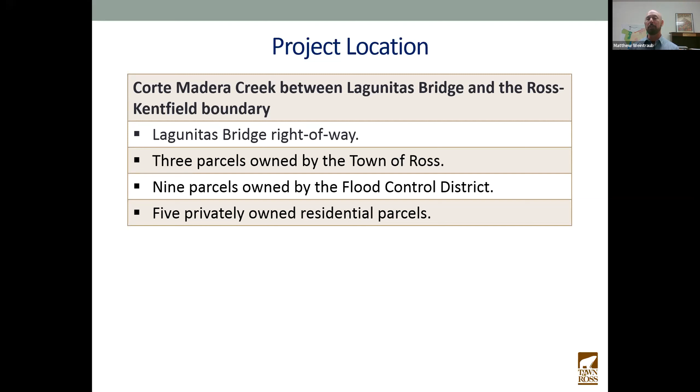I'm actually not going to share that many visuals during my presentation. I'm going to let the Flood District really show the details of the project.

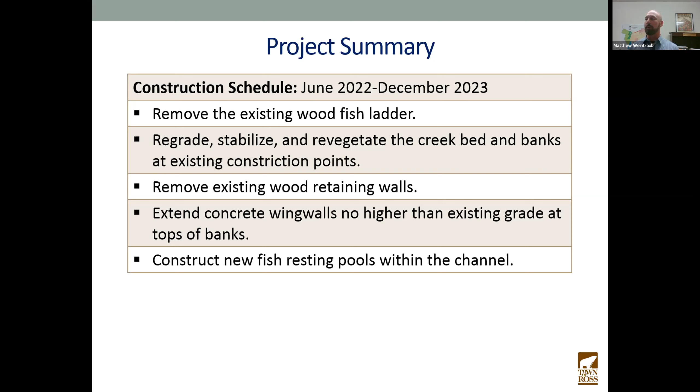Project summary: construction is scheduled for approximately 18 months, between June of this year and all of 2023. Major project components include removing the existing wood fish ladder, which is essentially an obstruction in the channel, regrading, stabilizing, and revegetating the creek bed and the banks at the existing constriction point, removing existing wood retaining walls, extending the concrete wing walls no higher than the existing grade at the tops of banks, and constructing new fish resting pools within the channel.

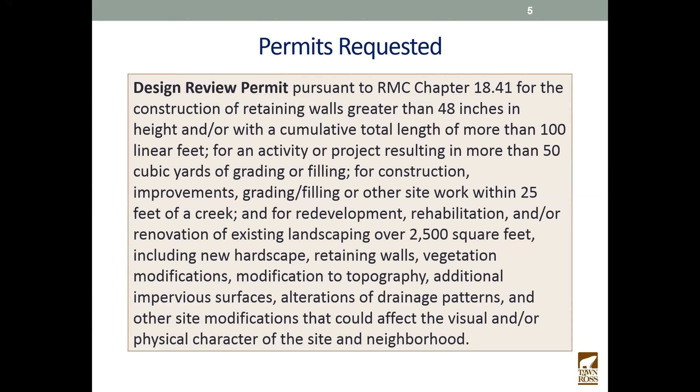A design review permit is requested. The project meets several of the thresholds for design review. I won't go through those details here. The details are included in the staff report, and I can cover any details that are requested.

Public notice area, as for all design review applications, was 300 feet. There were no written comments received in response to the notice. And to conclude, staff requests that the ADR group allow public comment, discuss the merits of the project, and provide a formal recommendation to the town council regarding consistency with design review.

That concludes my initial introduction to the project. I would like to now turn it over to Joanna Dixon with the Flood Control District, and I believe she would like to present further information on the project. I'm available to answer questions. Thank you.

Thank you, Matthew. Thank you, Matthew. Can everyone hear me all right? Yes. Oh. Hello, thank you for having us.

Good evening. I'm Joanna Dixon from the Marin County Flood Control District. We appreciate your time and interest in reviewing our details of the proposed Corte Madera Creek Flood Restoration Project, or Flood Risk Management Project, rather.

The Flood District is a separately funded district, which is staffed by employees of the county and funded through the tax revenues and fees that are collected from property owners within the limits of the Flood Control District Zone 9. And the district seeks to manage and use the funding collected locally and any grant money that may be available to help reduce the risk of flooding. And the district often partners with municipalities and other local groups to deliver projects that meet these objectives.

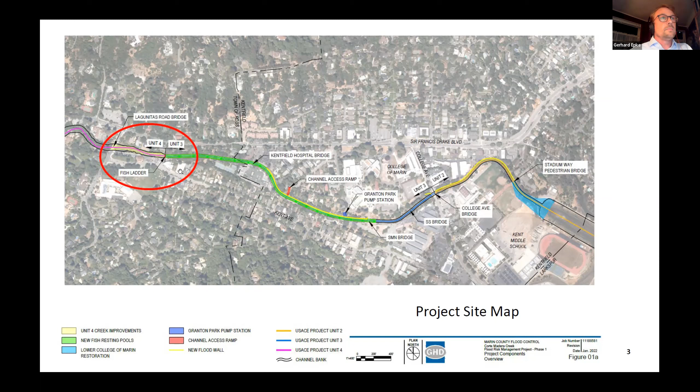As has been mentioned, this is part of a larger project that extends all the way down the concrete channel. We're only going to be talking about the portion within the town of Ross. Another part of the project within the town of Ross is improving the existing fish resting pools downstream from the fish ladder in the concrete channel, but we're not really going to dwell on that. We're going to focus on this area. So this is probably familiar to you.

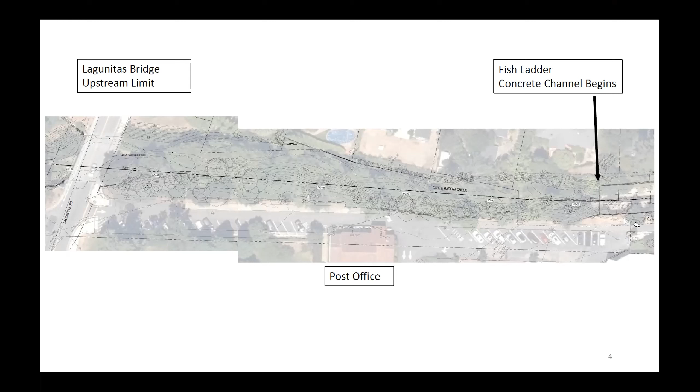Here's the Lagunitas Road Bridge, the upstream extent of the project. The creek is here along the parking lot. This is the post office building. These are private residences along Sir Francis Drake. And then right here, where the bike path kind of starts, there's a porta potty and a little way to look through the chain link fence at the upstream end of the concrete channel.

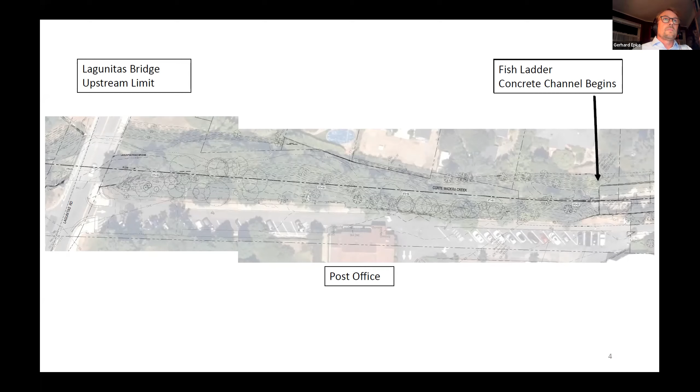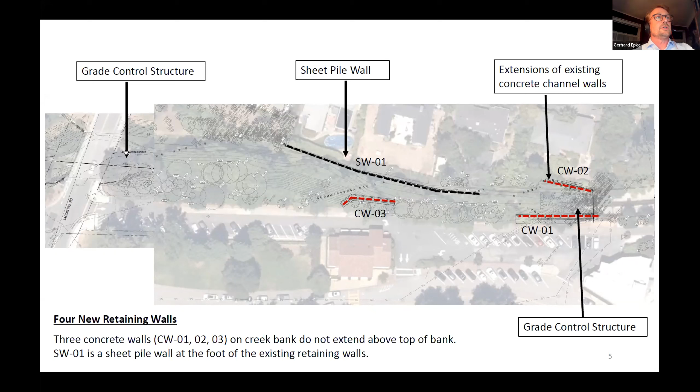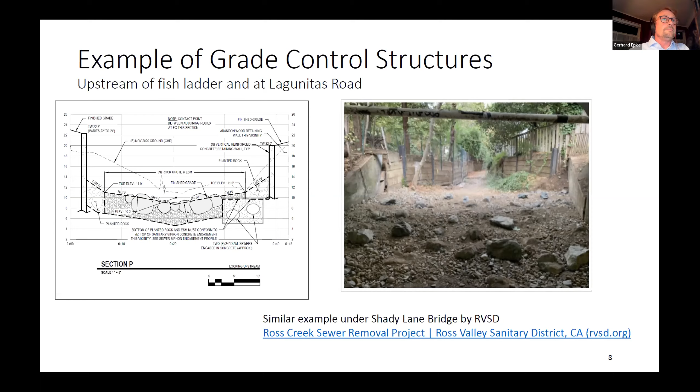At the base of and adjacent to the concrete and sheet pile retaining walls is bank stabilization in the form of rock slope or riprap. These are placed boulders, shown in the shaded gray areas. Here's an example—these boulders resist scour, protect the channel, or protect the stream bank from erosion, and will be planted. I'll get into the planting plan in a second.

Higher on the bank, where it gets disturbed, there will be some erosion control fabric and vegetated soil lifts, shown in tan here.

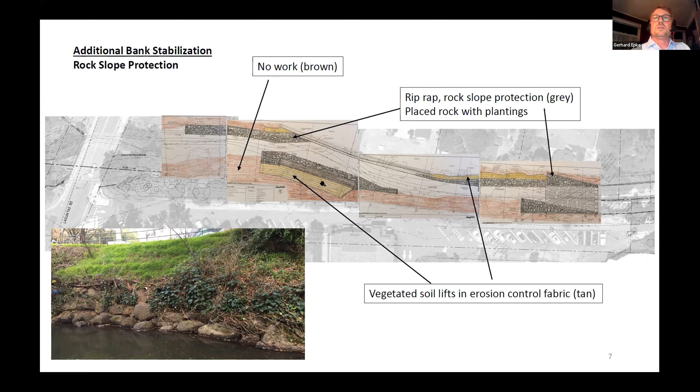This slide shows the trees proposed for removal. There's a total of 11 trees we're planning on removing, mostly clustered right at the downstream end of the natural portion of the creek as it goes into the concrete channel.

This is a view of that. You can see the trees are largely in the channel and creek, on this portion of the bank that will be opened up and graded back to give more capacity to the creek. There are also 3 trees behind the post office that will be removed, where it gets graded and where this concrete retaining wall goes.

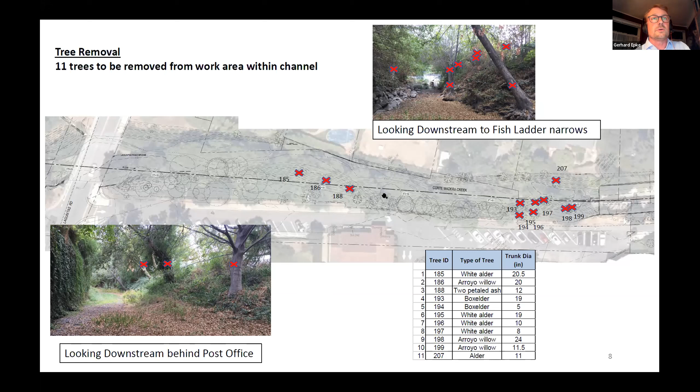This is a picture of the planting plan, which includes native, riparian, fire-resistant species. The species are listed here.

Generally, the concept we're following is that upland species and larger trees get planted higher on the bank to, in time, grow a riparian canopy and provide shading and good habitat for the creek itself.

Down in the channel, we'll have more brushy things like willows and elderberries that can take a beating at high flow, and then sedges, coffeeberry, and flowering currant. In and adjacent to the riprap, there will be live willow stakes and rooted willows, all along the channel where it gets disturbed with riprap and walls.

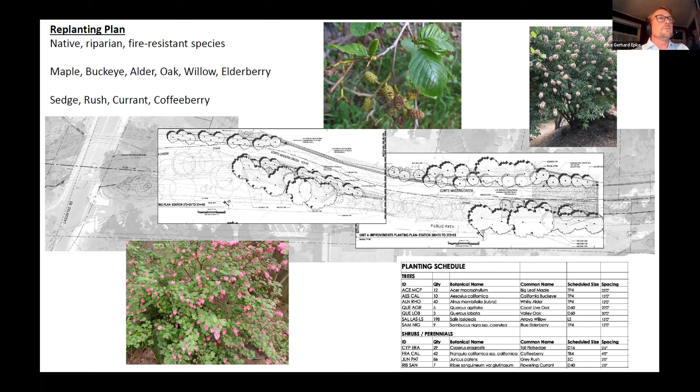This is moving into things that I think will be more visible to the public, starting with a change to the fence line. Currently there's a 4-foot black fence that goes from the beginning of the concrete channel upstream all along this bike path area, and for the most part, that remains undisturbed.

There's an access gate here near the post office that will be used. But this section, where there's green and orange dotted lines, will have the fence demolished as part of the construction of that retaining wall.

Plans propose extending the 6-foot fence farther upstream along the top of the retaining wall, in part to protect anybody from inadvertently jumping over and having a bigger fall than they expect. It also pushes the fence towards the creek a little bit, moving it away from the bike path and providing a little more space there.

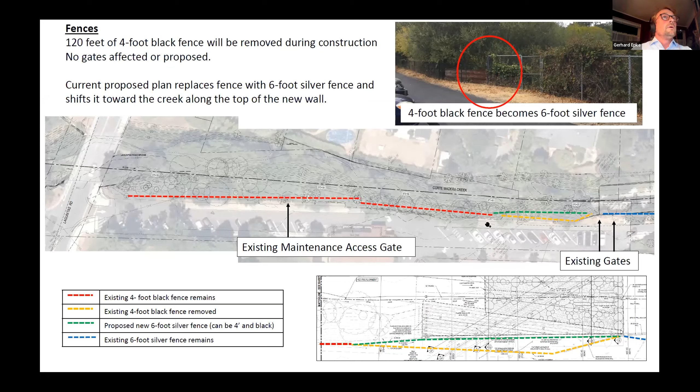Some more about the visual impacts of the project. This is looking downstream from the Lagunitas Road Bridge. Here, the gravel in the middle of the creek would be expected to lower itself by a foot, maybe a foot or two, which would largely be indiscernible, I think.

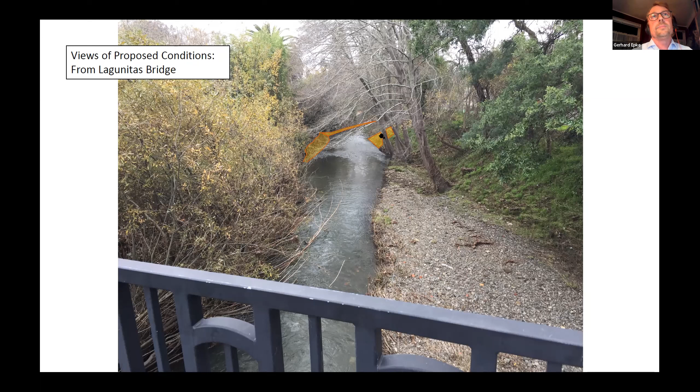The structural elements of the project are farther downstream. Here is where the rock slope would be, the sheet pile wall is here, and the right bank gets cut off back there behind the trees. So when the trees leaf out, it will be pretty hard to see from the Lagunitas Road Bridge.

Here's some examples of sheet pile walls. There's one just downstream from the post office underneath this section of fence. There's one across from Town Hall.

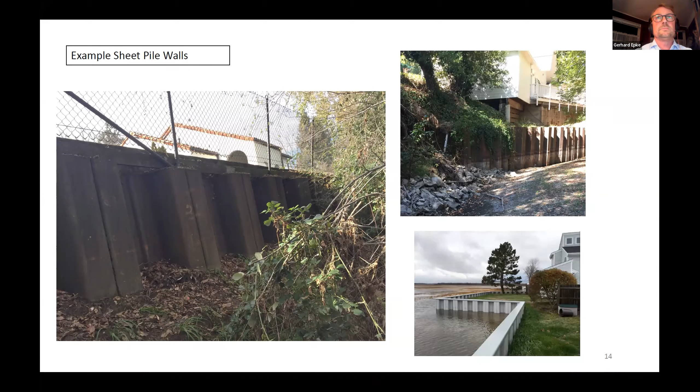The riprap and the rock slope that is currently there would be in a different place. It would be moved upstream and sit lower down, but it would have that same kind of look over time.

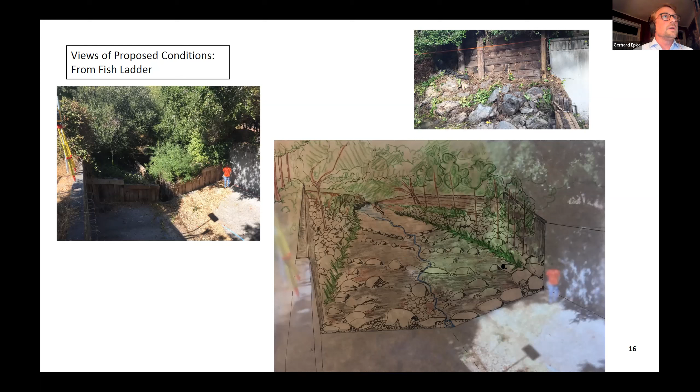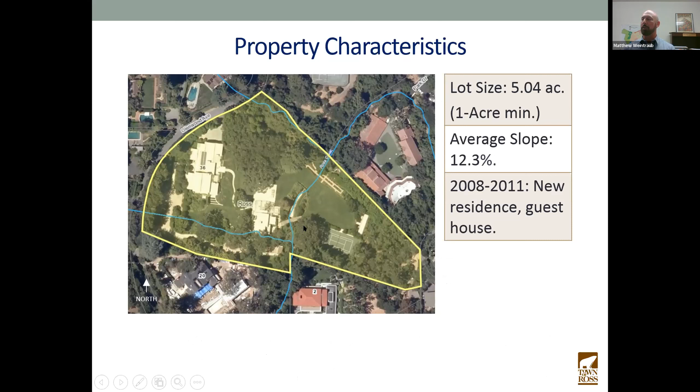The project plan includes constructing a new art studio in the back of the property. I'll go back to the site plan and show that the project site is in this area here, behind the existing residence in the open lawn and the sport court area. The project involves removing half of the existing sport court and constructing a new art studio on that location. It also involves renovating the landscape at the center of the lawn with a new concrete pond, a bridge, patio, and trellis structure.

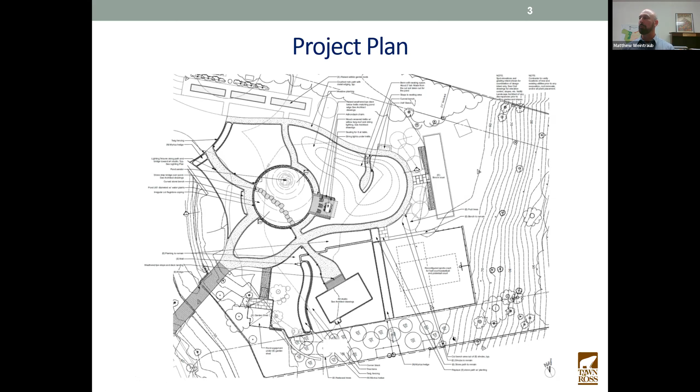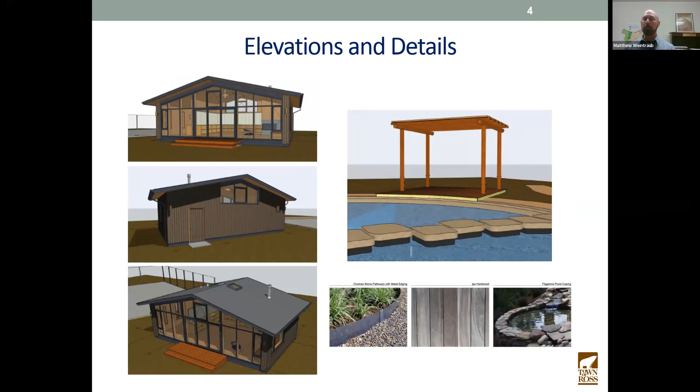There are no setback encroachments. The project meets all the zoning requirements for floor area coverage and setbacks. Here are some elevations and details, I won't spend a lot of time on them. The architect may want to present more information on the aesthetics, but we can see its quality, materials, and naturalistic appearance. The permits required are a design review permit only for the new construction of the new building, and for the grading and for the new impervious surface coverage.

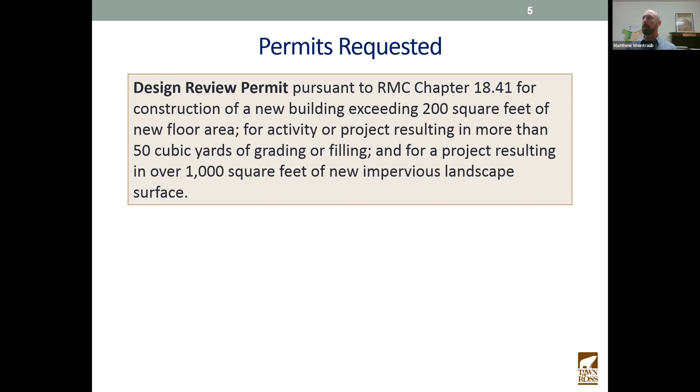Public notice, as for all design review applications, was 300 feet. No written comments have been received as of now. And that concludes my brief introduction to the project.

I'll now stop my presentation. The project designer is Hart Wright Architects, and the property owner is listed as 36 Glenwood LLC. I believe Eliza Hart is the presenter and would like to present some more information on the project, and I'm available to answer questions.

Thank you, Matthew. Thank you. Can you all hear me? Yes. Great, I don't really have too much to add, I can just explain the building and what inspired our design.

Let's see, do I have these sharing abilities? No.

We were very inspired by Northern California Modern, and this building addresses the beautiful open site of the lawn. There's a big wall of glass so that you can look out into the property. It doesn't look onto the neighbors at all. It has a high clerestory window, so there's no privacy issues. It's just natural wood, metal roof, and a lot of glass.

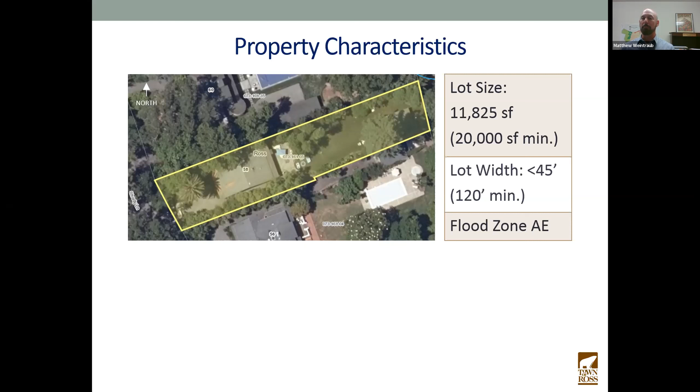So it has a number of constrictions for development in terms of available space and locations. The project plan involves working with behind the existing single-family home.

It involves a second-story addition to the back of the home, converting a portion of the first story to an accessory dwelling unit, and constructing a new rear porch over an existing hardscape patio.

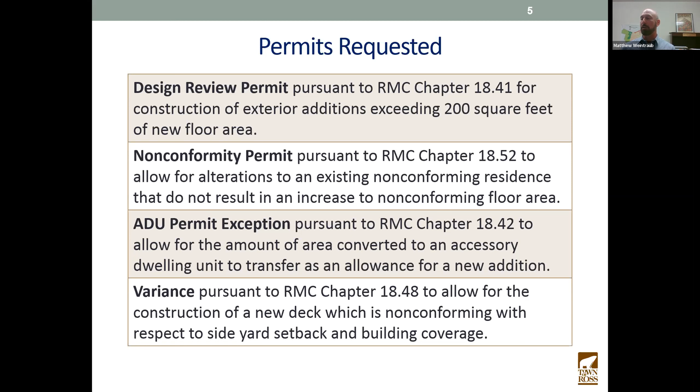The permits requested include design review for construction exceeding 200 square feet of new floor area, a non-conformity permit to allow alterations to an existing non-conforming structure with non-conforming setbacks, an ADU permit exception to allow space converted to an ADU to be transferred as an allowance for the second story addition, and a variance to allow for the new deck, which would be non-conforming with respect to side yard setbacks and building coverage.

The public notice area was 300 feet. We received one comment from the owners at 51 Shady Lane, who requested that the project construction avoid impacts on the neighborhood, which they've experienced in the past.

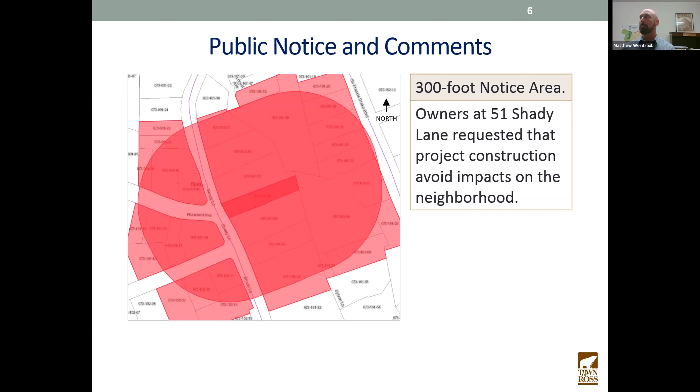That would be addressed during the building construction phase. The building department would look closely at the construction management plan and approve a final plan at that time. So staff requests that the ADR group allow for public comment, discuss the merits of the project, and provide a formal recommendation to the town council.

That concludes my introduction to the project. I will now introduce the project designer, Polsky Perlstein Architects. I believe either Elizabeth or Jared or both may be available. I'll mention that the owners are Robert and Madeline Wigington. That concludes my presentation, and I'm available to answer questions.

Thank you, Matthew. Jared, are you going now? Yeah, Matthew, thank you very much for your presentation.

I'll keep it brief. Essentially, this is the remodel of the rear of the house. We're creating a JADU, an ADU at the southeast corner. The house needs an upgraded stair, it's actually a very dangerous winder stair. We're trying to upgrade the upper floor to have a reasonable primary bedroom and bathroom. It's a small, sort of symmetrical addition.

To my knowledge, the neighbors have been in full support, and we're happy to share screens and show more details, but I think you could see the extent of the addition fairly clearly from what Matthew showed. So Elizabeth and I, and Madeline Wigington are here to answer any questions.

Would all of you like if Jared were to go through the plans specifically and walk us through it, or does everyone on the ADR understand the plans and what is being proposed?

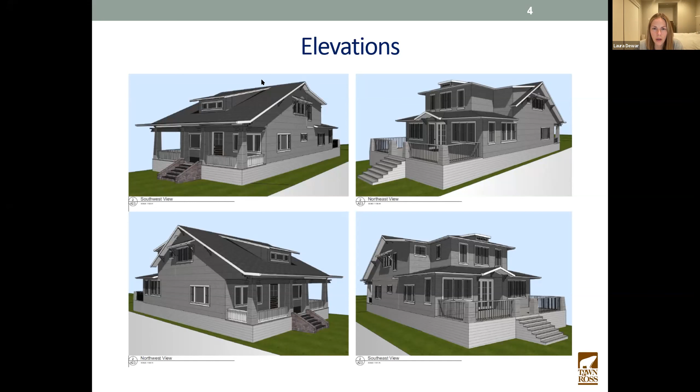Any other questions from the ADR? My question, the ADU unit entrance is just through the back deck only, right? Right, yeah, the right side of the house is driveway for the cars. So you want to have a door, and it's up in the air, so you can, yeah, exactly. You pointed to the entrance to the ADU.

I have a question, Matthew. What are the main parts of this that are mandated by the state that we do not have any control over accepting? So the ADU itself would be subject to a ministerial permit if it were not part of this larger project. So the ADU conversion is something the owner could do without attaching it to any other part of this project and without going through a discretionary process. In the house, yes.

And are there any other... and that includes growing the house to compensate for the space that's then allocated for the ADU, Matt? So that part is actually a discretionary action. To take the area that's converted to ADU and grant that as an addition to the main residence, that's discretionary. I see, so that's called exception to ADU permit.

I see. And it was mentioned in the project materials that there was a waiving of parking requirements that I wanted to get really clear with you, because there's not a lot of parking there. So we're having an ADU and a household with 4 to 5 bedrooms. So what's the story with parking?

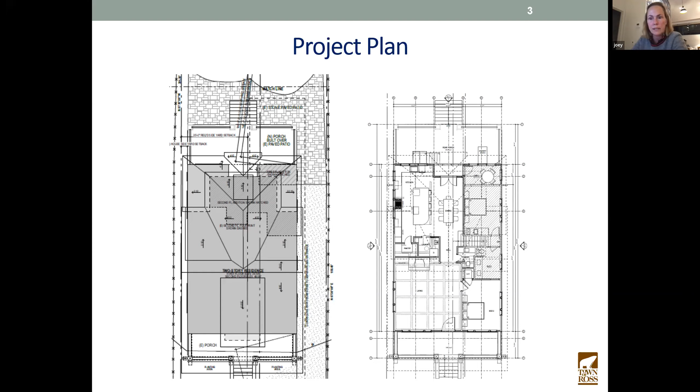So the next step, Mark, would be to open it to the public, is that correct? Mark Cushnet. Hello. Well, he's gone, but yes, that is your next step. Okay, so I will now open this discussion to the public if there are any people out there that would like to comment on it. I am seeing no raised hands. All right.

So let's bring it back to the ADR for recommendations. And since I'll go last, who wants to go first? Stephen? Okay, I'm happy to.

I think that I generally support the project, and I support the notion of making this house larger for the purposes of including the ADU in the house. I don't think it negatively impacts the surrounding houses or the privacy of those houses or the Ross environment generally. And I think that the bulk of the house is okay on the site in its enlarged form.

I'm uncomfortable with the roof lines at the back because I just admire the ones at the front and their simplicity, and I like the little dormer coming out of the single roof line. So it's my temptation to try to consolidate the number of roof forms on the back. And so, this is just a subjective suggestion, but maybe getting rid of the small peak over the center of the porch, or maybe omitting the small dormer at the top.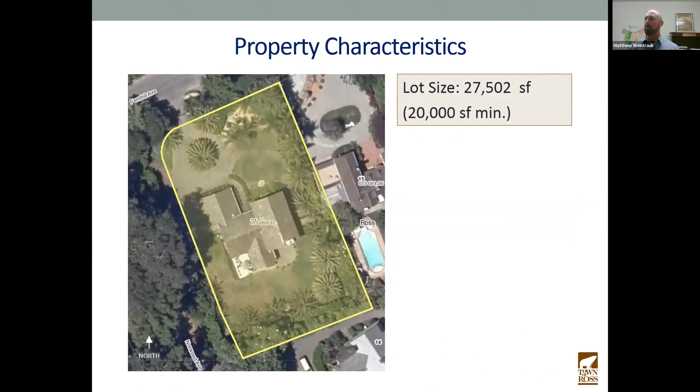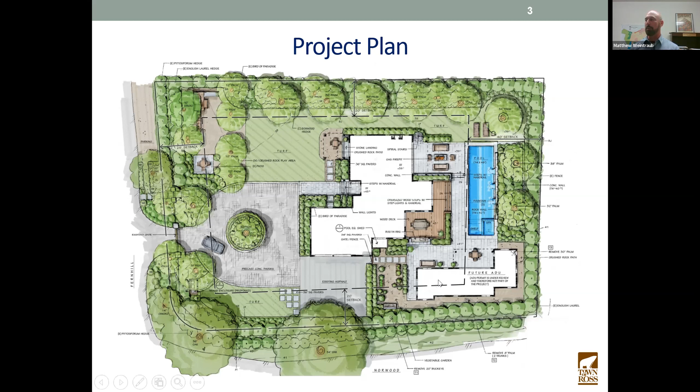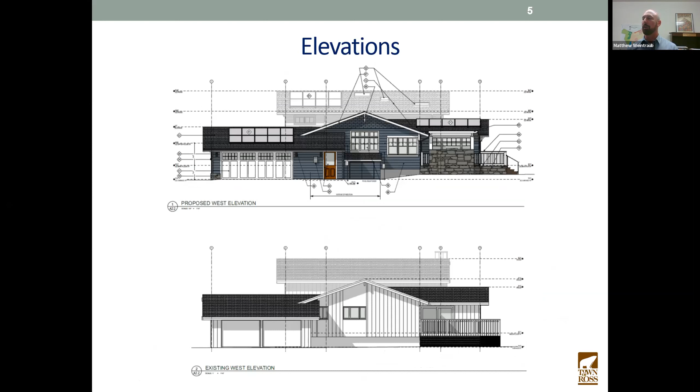Part of the project is also to renovate the exterior of the existing single-family home. We see the existing elevation on the bottom and the proposed elevation on the top, essentially transforming it from a more modern character to a more traditional type of architecture. I'll just flash through the elevations to get a sense of how that change would occur on each of the elevations.

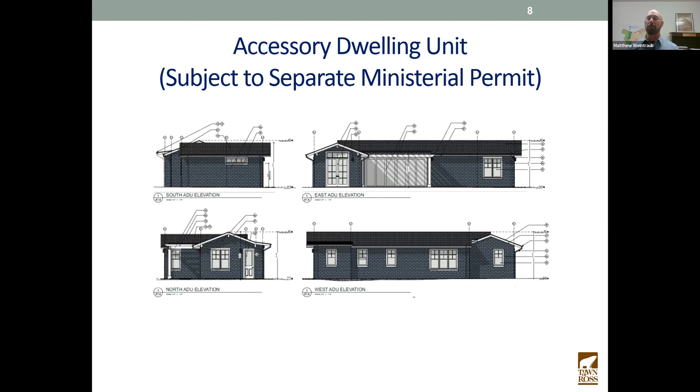And lastly, here are the elevations for the accessory dwelling unit, just for comparison with the main residence. Again, the ADU is not subject to design review or discretionary review. It's shown for reference only, so that the ADR group can understand the entire project.

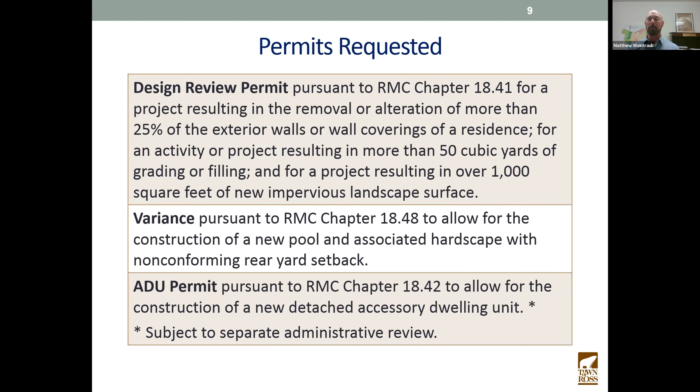So the permits requested include a design review permit to alter the exterior of the existing residence and for the grading and new landscape impervious surface. A variance is requested to construct the new pool within a setback, and separately, an ADU permit is requested for administrative approval of the detached ADU. The public notice area was 300 feet, and no written comments have been received. To conclude my introduction, staff requests that the ADR group allow public comment, discuss the merits of the project, and provide a formal recommendation to the town council.

The property owners are Stephanie and Russ Haswell, and the project designer is Polsky Perlstein Architects. I believe Jared is here, and Laura, I believe, is also here with Perlstein Architects, and Imprints Landscape Architecture is also the applicant. That will conclude my presentation, and I'm available to answer questions you may have.

Thank you, Matthew. Jared, would you like to introduce the project? Certainly. This is a reworking of the floor plan with a very minor addition on the west side, and changing the look of the house to a more traditional house with different colors, different materials, different windows and doors.

We're happy to share 3D images if you'd like, but I think it's pretty straightforward. They would love to have a pool. Since the house is set in the middle of the lot rather than towards the street, the pool is shown where it is. We've minimized the pool as much as possible and maximized the distance from the rear property line to the pool. The ADU is ministerial, but it will be Stephanie Haswell's father's place to live, truly an ADU. I'm happy to answer any questions.

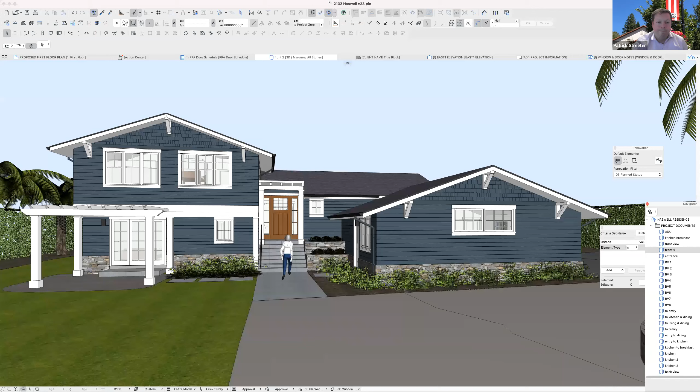Can you see my screen? Yes, okay. So you want to go to the back where the spiral stair is? Yeah, just curious about that. Is that a form of egress? Well, that's the primary bedroom on the second floor, so it's just a way for them to get down to the deck area from their bedroom.

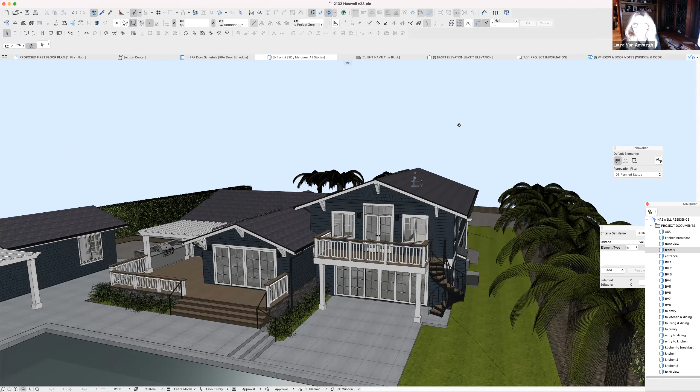Anyone else on the ADR, any other members have questions for Laura or Jared?

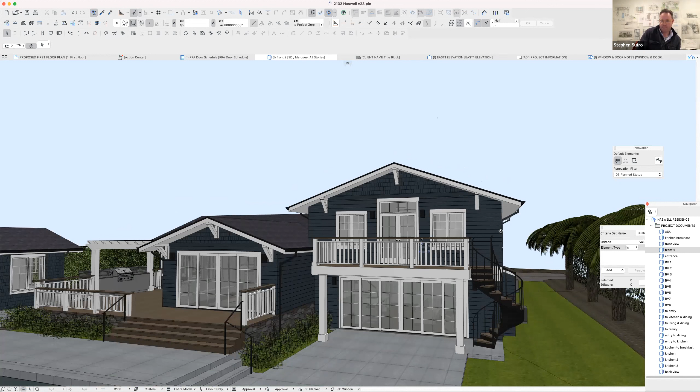I have a quick question. I couldn't understand, or maybe it's not in the documents, what the underside of the eave material is there. Well, this is all existing for the house, so the underside currently - I don't know if it's plywood or T&G. I'm sure it's wood, I think T&G, but I can't recall. But if it's existing and you're not modifying it, I guess it's not part of the progression - right, it's existing roof. Understanding, okay.

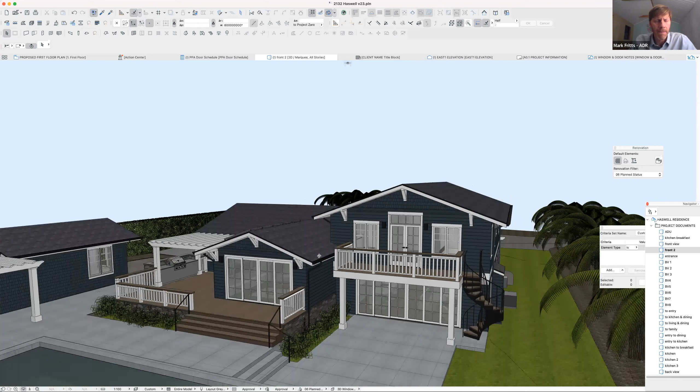One quick question - when I looked at the staking of the pool, there were two different colors of ribbon. Was the second portion intended to be the spa stair section? Maybe Brad can answer that. This is Brad, I staked the pool. I was asked to stake the pool and then the patio that was in the setback. So the pool is staked in red and the patio area that's in the setback is staked in green. So that's the section that would be abutting up to the ADU? Yeah, correct, that part of the patio was staked in green. Got it, thank you for that clarification. I appreciate that. Brad, would you like to give a presentation of the pool and landscape improvements?

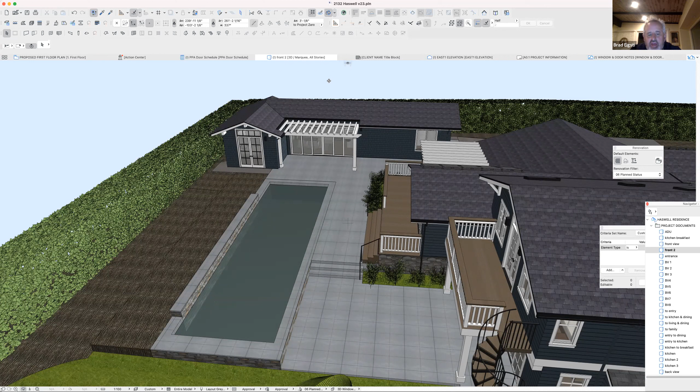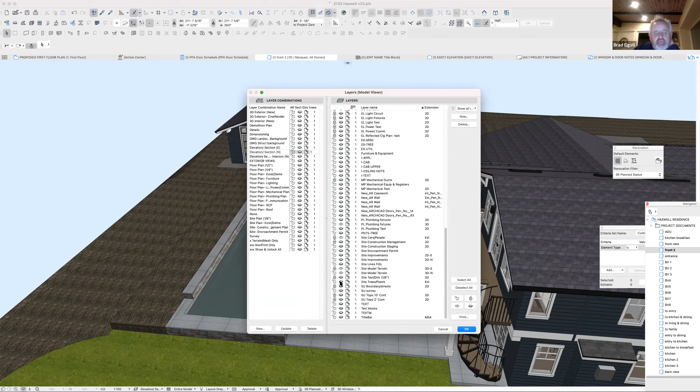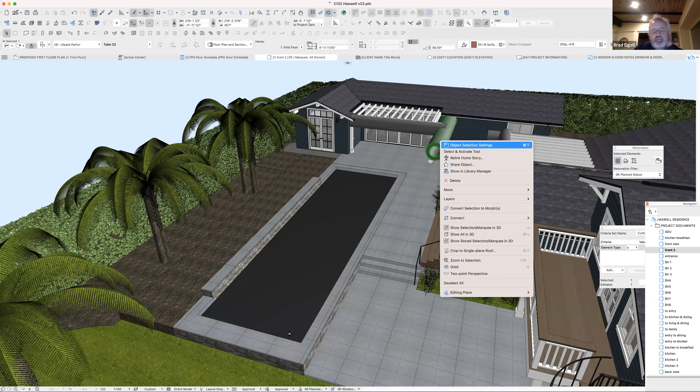Sure. The pool, we pushed it as close to the house as made sense, and we kept the pool very narrow. The property has dense hedges around all sides and is very private, and there's some large palm trees. We wanted to respect the hedges and respect all these beautiful palm trees, so it really got pigeoned into this space. We went with long and narrow versus pushing towards the shared property line. The plans were shared with that property line, the Gambles, and they were supportive. On the other side of the hedge is their garage, so that's not their primary living space. This just seemed like what made the most sense to us.

Does anyone have any questions, any of the ADR members, for Brad, Joey or Laura? I have one more - the material, Brad, where the palm trees are, on the southern side of the pool, what are we looking at there? Is that some planting, mulch? Just kind of a layered planting scheme that provides more separation and privacy. What I'm looking at that's brown, I think that's just in the rendering. If you go back to my landscape concept plan, it has a planting plan.

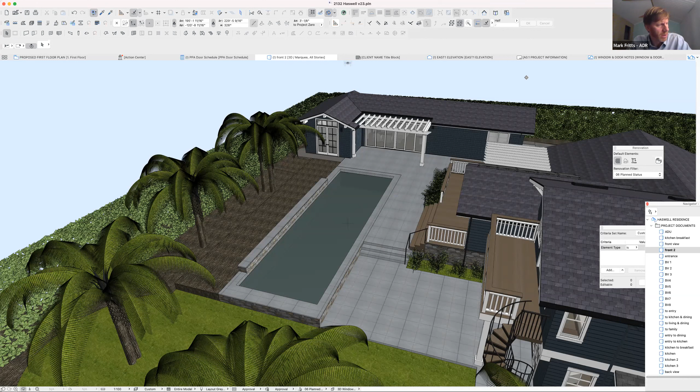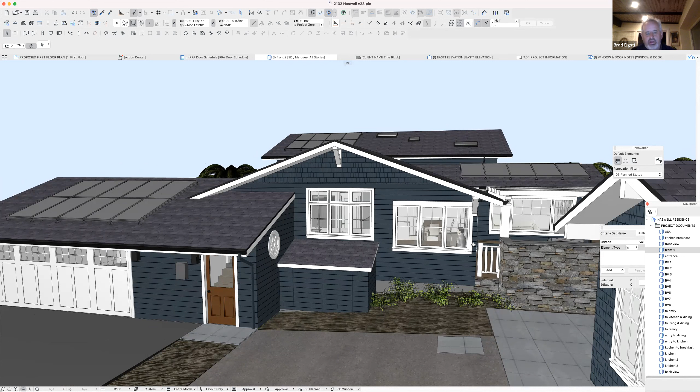And then the pool equipment location? That's adjacent to the garage. Laura could probably spin around here, it is right there, kind of tucked under that window with a roof and then completely enclosed, and that conforms to all setbacks as well. Thank you. Does anyone have any questions about the materials of the remodel of the house, the exterior materials or colors?

I just have a question with that spiral staircase. It just kind of sticks out. It doesn't really look like it matches what's happening with the house and the balcony, so I'm just curious what the design intent was.

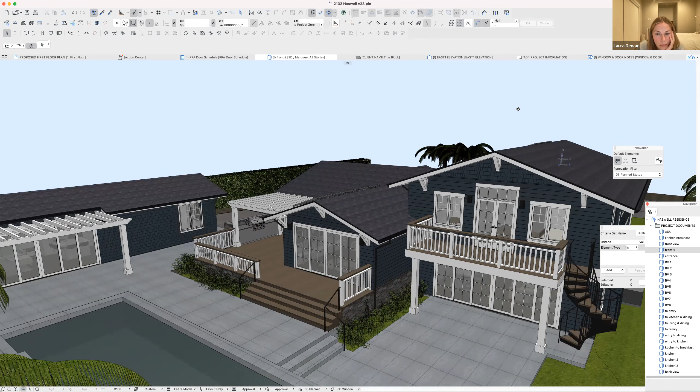Joey or Laura? We want to go ahead, Laura. Well, I was going to say that we have these for purposes of being a long lasting stair, it's metal with wood treads. But we have black accents throughout the house, so it seemed like an element different enough from the rest of the architecture that could be one of these accent colors versus the white.

We also explored having the stair be a traditional stairway from the upper level. But the vertical distance was so much that the stairs ended up way out towards the pool and cut off access to the side yard. We couldn't run the stairs in front of the windows of the lower room, so it pushed the stairs out. The owners just wanted these to be hidden minor stairs providing access to the pool from the master, not a main access into the house.

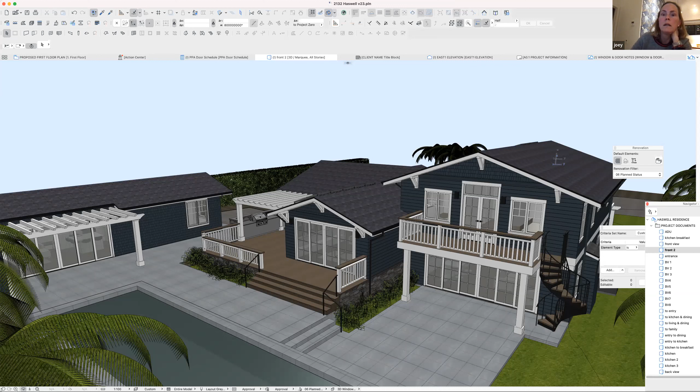Okay, any more questions from the ADR? If not, I'll open it to the public. Are there any questions from the public regarding this project? Not seeing any hands raised.

Okay, so I will bring it back to the ADR for recommendations. Who would like to start? I'll go first, I can jump in. Go ahead, please go ahead.

I have no problem supporting this project. I feel like the encroachment of the pool into the setbacks is mitigated by the fact that it's on the Gamble's driveway, not close to any of their living spaces, and already well vegetated. We can't really have anything to say about the ADU anyhow, but its placement doesn't affect any neighbors since across the street isn't really a living area of that property. If there's a place to put an ADU, that's probably a good place. I'm supportive of the change in appearance of the home, the finishes and colors. I think it will be very attractive.

My one bee in my bonnet is that spiral staircase just seems really out of character with the house, and it's just not very attractive. I don't even know if you need it, but that's pretty much the only problem I have with this project, and I can support it.

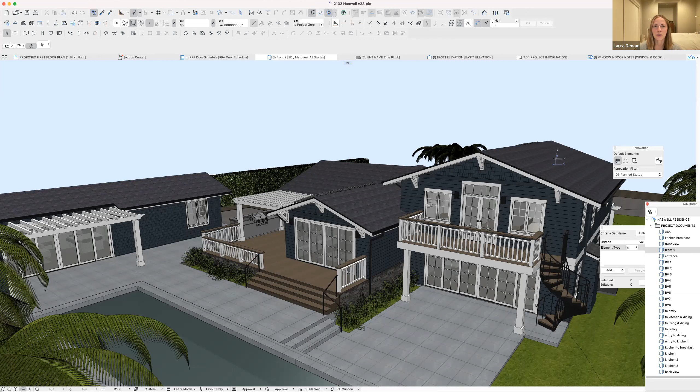But again, the one thing that really stuck out to me was that spiral staircase. It just doesn't seem to fit with the rest of the architecture. I think those were my only comments.

Okay, Mark? Yeah, I can generally support the project. I think it's a fantastic job in freshening up the home from an aesthetic standpoint. I concur on the spiral stair. I'm not sure a concern is really the right way to put it, but in general I always look at decks on the second floor of a home as somewhat suspect as far as privacy goes. This one is relatively narrow, so I don't think someone's going to spend a lot of time out there. But I wasn't able to get up on that level, and I think you can start to see the Gamble's home on the second floor from that second floor deck.

So I'm always a little bit hesitant to support second story decks within tight property lines, but in this particular case, I think it's okay. The stair, I concur with the rest of the ADR members, it's a little bit of an unusual choice. Doesn't seem to fit. I understand you were trying to make it tight and not have something that juts down into the majority of the property. Is it necessary? Probably not. So I would probably also concur to eliminate it. The rest of the project is quite nice.

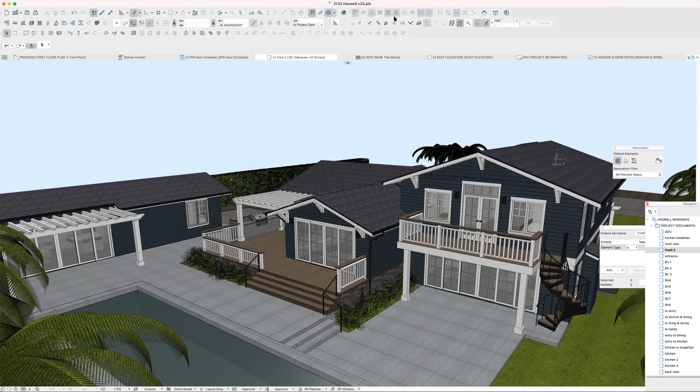Yes. I do see a hand raise. I'm sorry to jump in there. Oh, Russ Oswald. Hi, this is Russ. Thank you guys all for the feedback. Mark, I just want to let you know, Mark Fritz, you can't see the Gambles from the balcony because that's where the bedroom is. So just want to put that at ease for you. Appreciate that. Thank you. Yep, appreciate it. Great. Okay, even better. So good luck, and it's going to be a wonderful project.